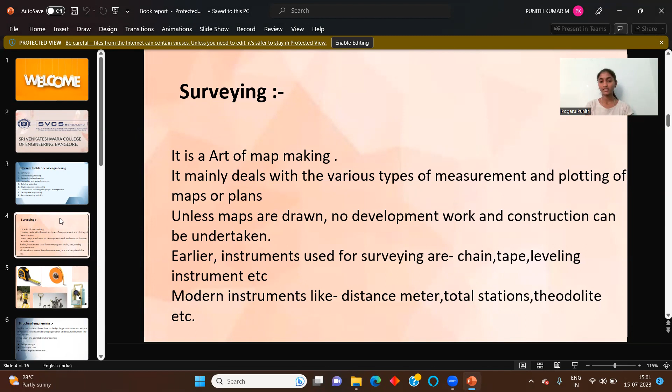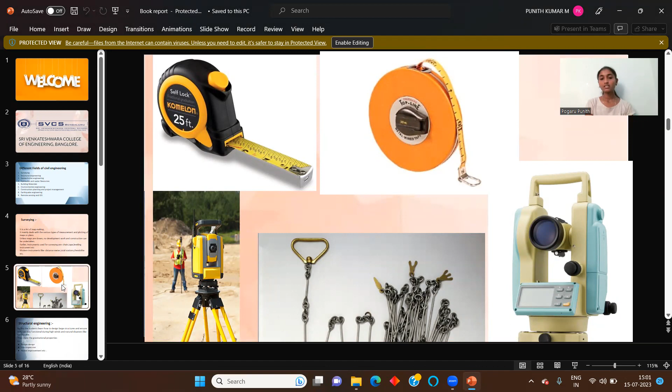In olden days, some of the instruments used for surveying were chain, tape, leveling instruments, etc. But due to advances in technology, modern instruments came into existence, such as distance meter, total station, theodolites, etc. These are some examples for surveying instruments.

Next is structural engineering. Structural engineering mainly deals with the analysis and design of various structures like steel engineering. For example, any building materials like industrial buildings, towers, those are constructed using steels, and the concrete structures like buildings, bridges, dams, tunnels, etc. So structural engineering designs steel, concrete, timber, frame structures such as tall buildings, towers, bridges. Those are all examples for structural engineering. In structural engineering, it mainly studies the gravitational properties of structures.

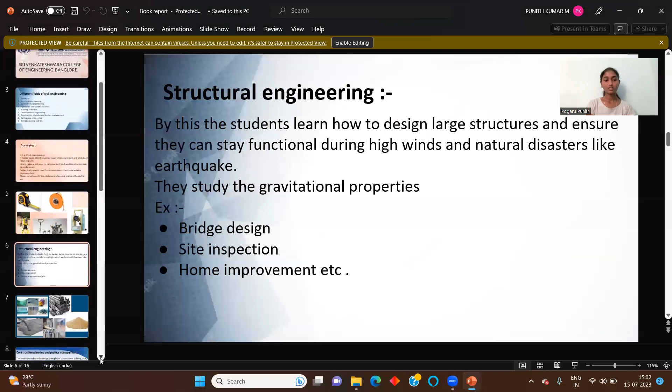Next is construction planning and project management. It plays a very important role while constructing any buildings or any structures. It deals with different types of constructions of structures like buildings, roads, bridges, etc., construction of underground tunnels using modern equipment, and construction of floating structures.

In early days, only manpower was utilized for construction, but development of new technologies, that is manufacturing of new machineries like cranes to lift weights, paint machines, plastering machines, concrete or tar laying machines, have made construction so easy and very fast. So project management, planning for construction equipment and machineries for construction projects, deals with the planning, scheduling, and execution of construction activities related to any projects. It is about planning management.

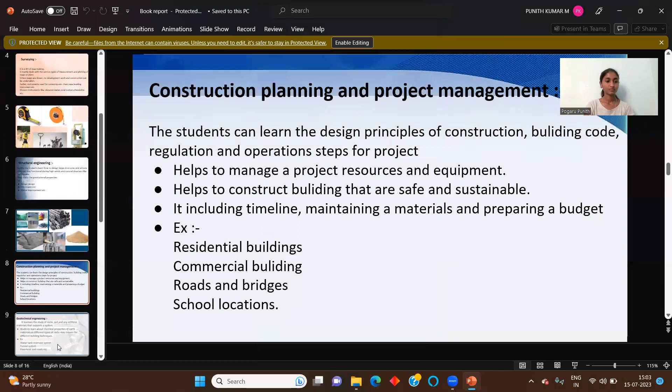Next is geotechnical engineering. Geotechnical engineering mainly deals with the study of soil, its types, and properties of soil. It involves rock, soil, and any artificial materials that support a structural system. So any building, bridges, dams, walls consisting of components like foundation - to build a good foundation, good geotechnical engineering is required.

Geotechnical engineering analyzes the soil to determine its suitability to support extreme loads. Examples for geotechnical engineering are water tank reservoir systems, tunnel systems, pavement systems, and roads.

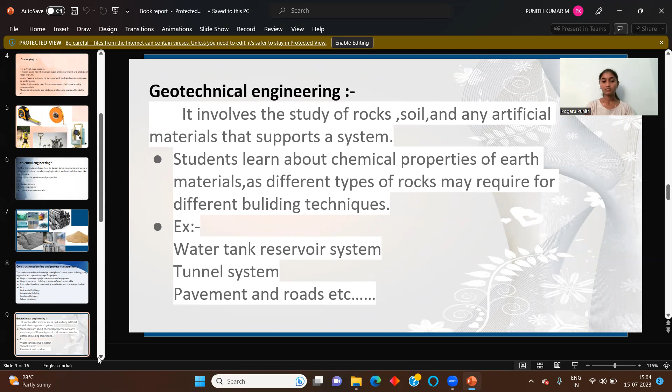Next is environmental engineering. It is a very important branch in civil engineering which covers both water supply and sanitary engineering. So the science of environmental engineering deals with the subject of tapping water from different sources, testing its quality, and the purification process and distribution of water to customers.

They typically study the chemical properties of water, soil, air, and can design a technical mechanism that solves pollution issues. So to protect our environment and human health, good environmental engineering is required.

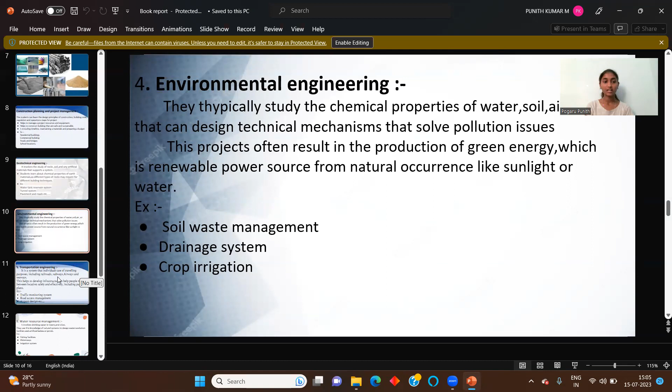The next is transportation engineering. Obviously, it plays a very important role in economic development of countries. It mainly deals with the study of existing transportation systems and their implementation for safe driving. It mainly includes the design, construction, and maintenance of roads, railways, navigations, and air routes.

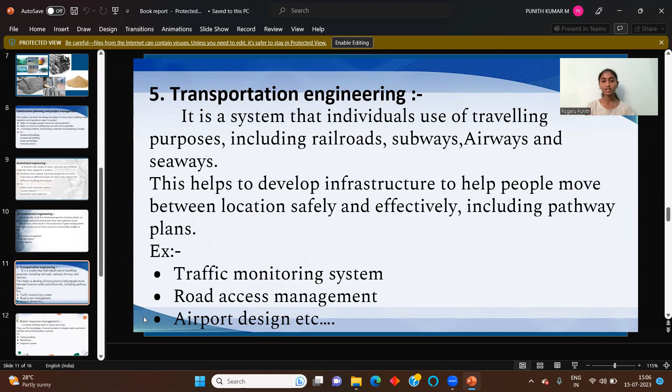Traffic management includes traffic signals, number of lanes, parking facilities, and curves are also a part of transportation engineering, and it helps to develop infrastructure to help people move between locations very safely and effectively, including pathway plans. Examples for transportation engineering include traffic monitoring systems, road access management, airport designs, roadways, airways, waterways.

And next is water resource management. It involves drinking waters in towns and cities.

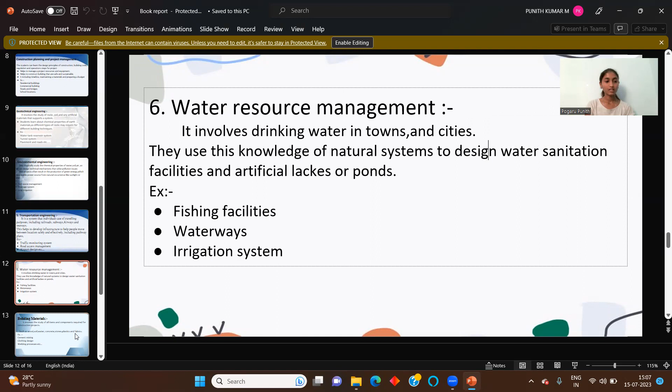Next is building materials. Building materials play a very important role while constructing any structures or buildings. It involves a study of all the items and components required for construction projects. Shelter is a basic need for every human being. To get a good shelter, materials used in building construction should be very good quality. The important factors in selecting good building materials are durability, strength, appearance, cost, availability, and labor requirement.

Building materials are majorly differentiated into two categories: natural and artificial building materials. Natural building materials like sand, stones, timber, and wood are examples of natural building materials. Artificial building materials are man-made, such as bricks, cement, concrete, flooring, roof tiles, and glasses. Concrete is a mixture of sand, jellies, cement, and water. Mortar is a mixture of cement and sand with water. Those are examples of building materials.

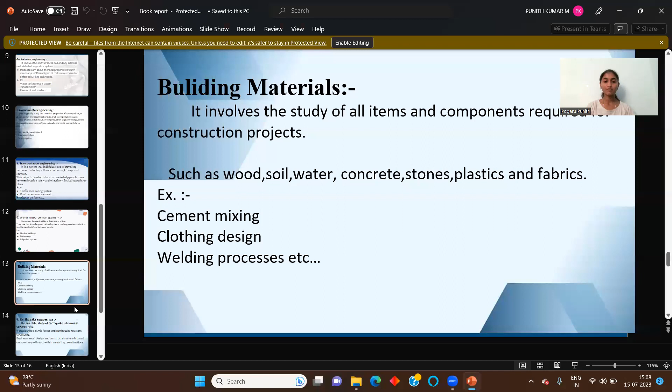Next is earthquake engineering. Earthquake engineering is the study of earthquakes, also known as seismology. An earthquake is a sudden and rapid shaking of the ground due to the passage of vibration beneath, caused by transient disturbances of the gravitational equilibrium of rocks. The scientific study of earthquakes is also known as seismology.

Seismic waves are recorded on instruments called seismographs, and earthquakes are measured using observations from seismometers. The time, location, and magnitude of an earthquake can be determined from the data recorded by seismograph stations. Earthquakes with a magnitude of about 2 or less are usually called micro earthquakes and are generally recorded only on local seismographs. It studies the seismic forces and earthquake resistant structures.

While constructing any building, we have to look after all cases, like if there are chances of an earthquake, the building has to stand very strong during that situation. So to construct any building, good earthquake engineering is also required, and it plays a very important role in civil engineering.

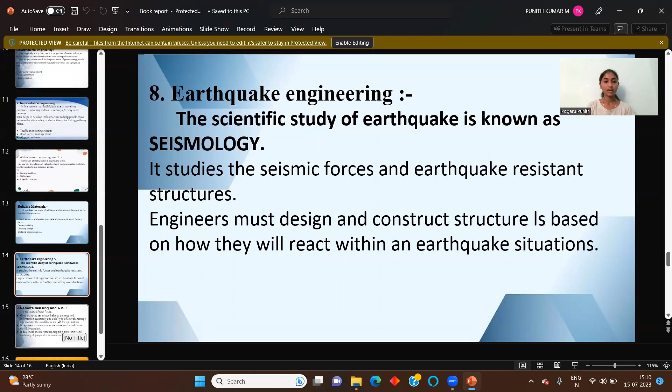The next and last one is remote sensing and GIS. They also play a very important role, and it's a new field compared to all other engineering fields. Good mapping techniques help get the required information accurately and quickly to effectively manage and monitor available resources for optimal use. It deals with the measurement, mapping, monitoring, and modeling of geographic information around us.

GIS is the high-tech equivalent of maps. It represents a means to locate ourselves in relation to the world around us. It is a good mapping technique. It improves space technology and availability of GPS, enhancing the scope of geographic information systems.

These are the main important nine civil engineering fields. I think you all understood.